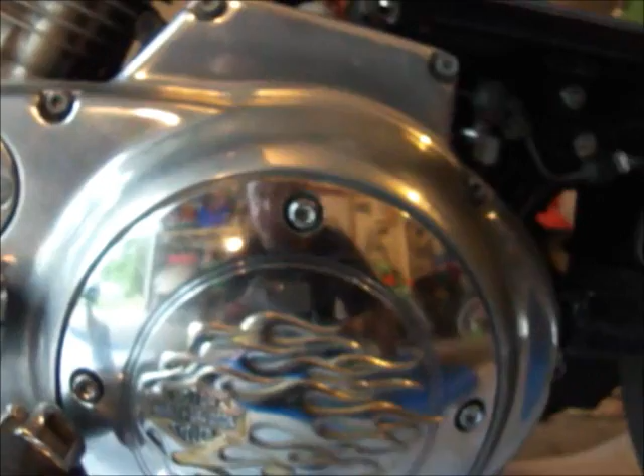I've only started it a couple of times. I'm going to drain it from that plug right there. I've already had that off, I've already had this off. Those are coming back off. I'm thinking it's the throw-out bearing or something like that. Never had one of these apart before.

Yesterday I did the clutch adjustment and also an adjustment in here similar to what Jess Hogan showed in one of his videos, and that was really helpful. I got the clutch play good, but I got this strange squeaking sound in here, so we got to figure it out. Since I've never been into one of these before, it's a good idea to have one of these on hand.

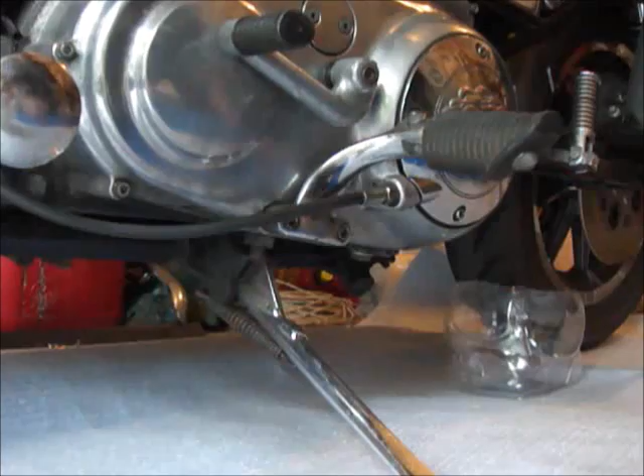Alright, this should come off easy since I just had it off. You don't want to tighten it though.

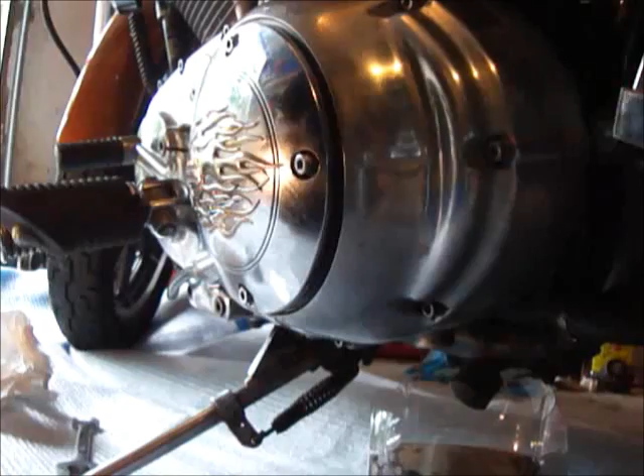Engine's cold, so this is going to take a little longer. We'll just take that out, let it drain in there. Alright, 3/16 Allen.

I was down this road last night, so this is pretty easy. Just take the derby cover off. There's a spring in here holding a retainer nut.

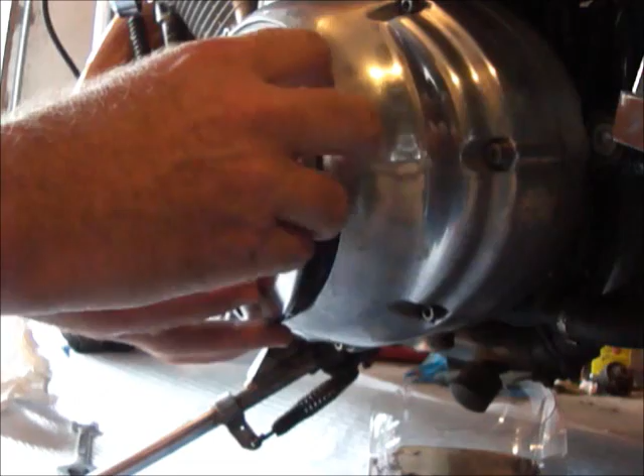This is just held on by pressure. It's just a nut that keeps the adjuster from moving. And this is the action when the clutch gets pulled in. That's as far as I went in.

There's also an O-ring here that was going to fall off, so I'll just put that safely over there. I'm probably going to pull this assembly off, following the manual. I may end up taking this whole section off. We'll see how this goes. Until I find something that looks wrong, I'll just inspect each piece.

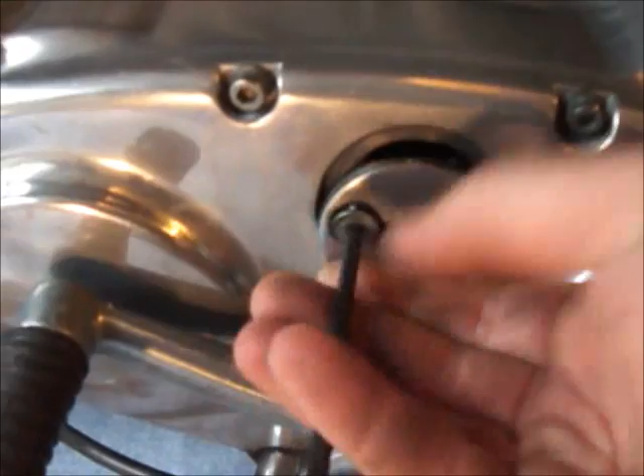Also, another potential source of noise in these is the primary chain, but I checked that last night. It can be up to a half inch of play, and there's not a half inch of play there. I think the issue is going to be in here.

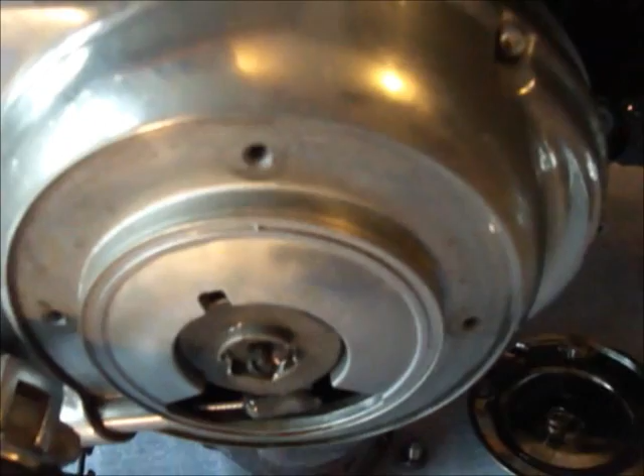Just like Fred showed us in his clutch adjustment video, so loosen this up, that lock nut there, and release all the tension off the clutch.

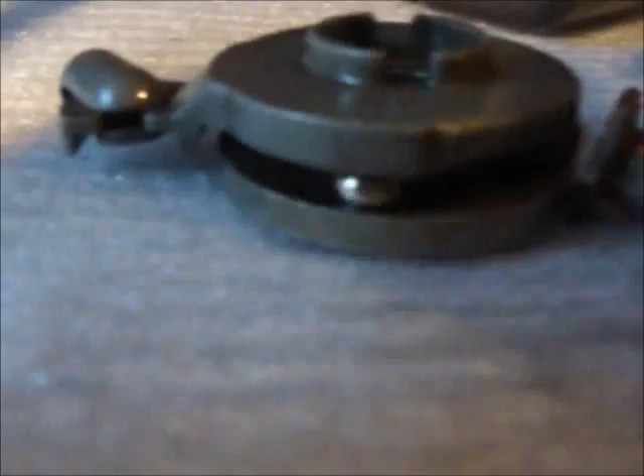So this is the clutch release mechanism, which slides out here, and there's this little nut that goes in and holds it in place. Once you get it in, this is your adjuster, and then this is just the coupling for the cable off the clutch. And that's out of the way.

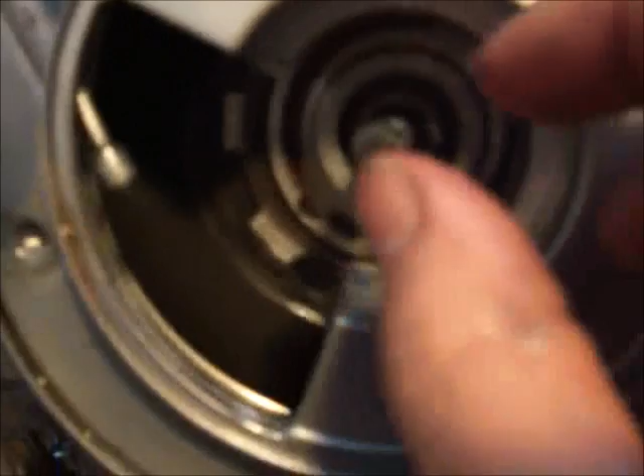But already I've noticed that this just doesn't feel right. That feels real rough, and I believe that's the throw-out bearing right there. Sure don't sound right. That could be the issue right there. That bearing's done. There was some filings off the plug when I cleaned it.

So I think the whole case is coming off next, and that would be that bearing right there, number 24. Just says it's a bearing.

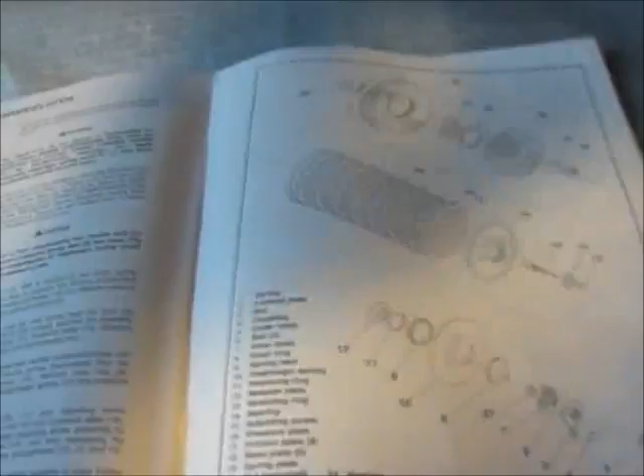I think that's the issue. So to get access in there, I gotta take that off, which means this whole thing comes off, and that'll expose this nut here, which could be loose. We'll make sure that's tight, and definitely gonna have to replace that, because that's an outer bearing.

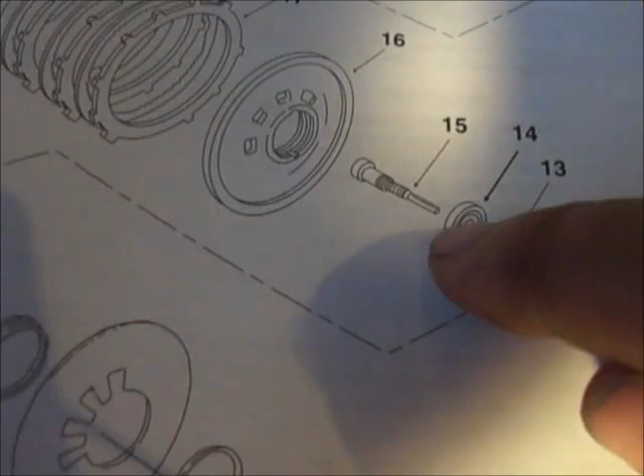I was thinking it was this one, but it's this one right here which is doing that. So we'll give this a go. Alright, start with the easy stuff. Loosen that. This has to come all the way out, all the way out.

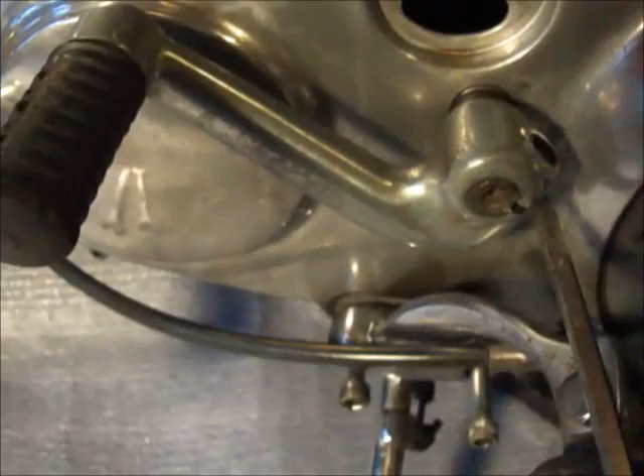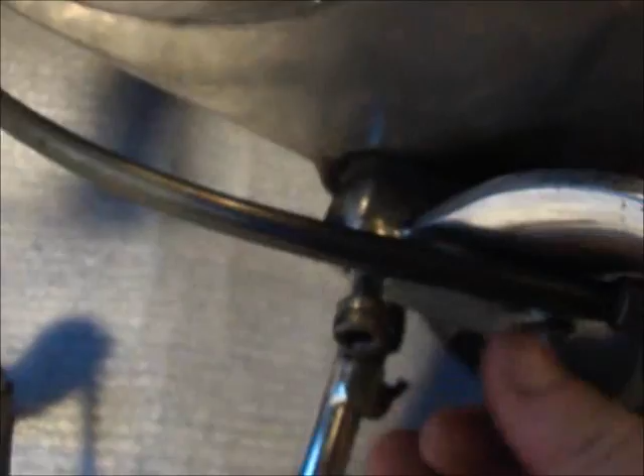Use the screwdriver as a wedge to open that just a touch. The shift lever comes off, and then pop this off. Oh, I can clean that. Might even polish it.

Alright, so I got all these hex bolts out. I noticed they're all different lengths. I was starting to sweat a little bit, but the manual I have shows which lengths go where, which is helpful. There's an adjuster, big adjuster bolt under here for the primary chain.

It said to loosen that. I probably should have taken this cable off, but I don't think I need to at the moment. Let's see what happens. Oh, there's a little rubber here. I'll put that with the shifter.

There's the gasket I'm going to replace. Oh, a little oil spill here. I'll stand this up so I can drain that after.

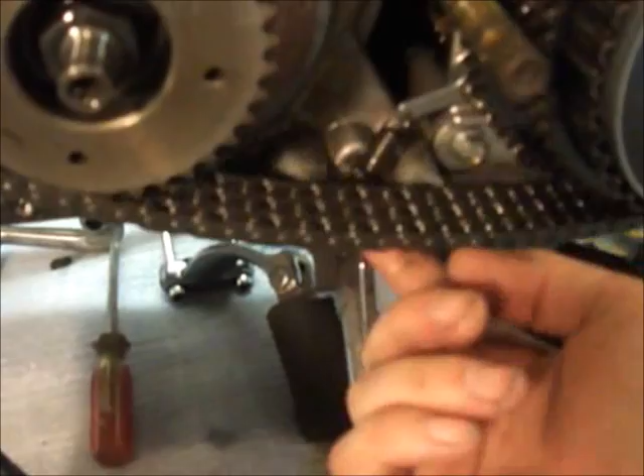Oh, that's more than an inch play. That's loose as anything. I'm thinking that's way too loose. Oh, you know why it's loose? Because the adjuster is not there.

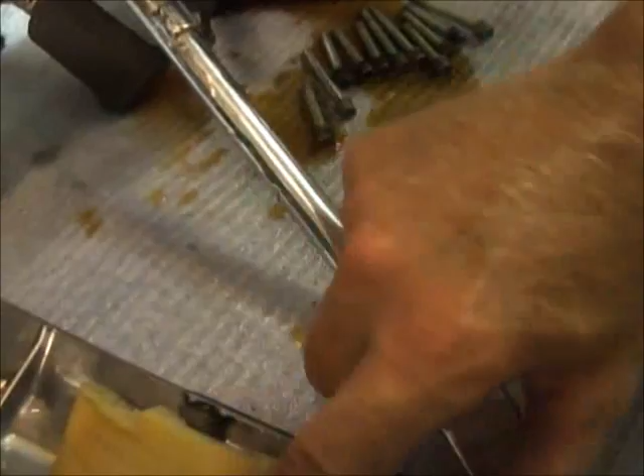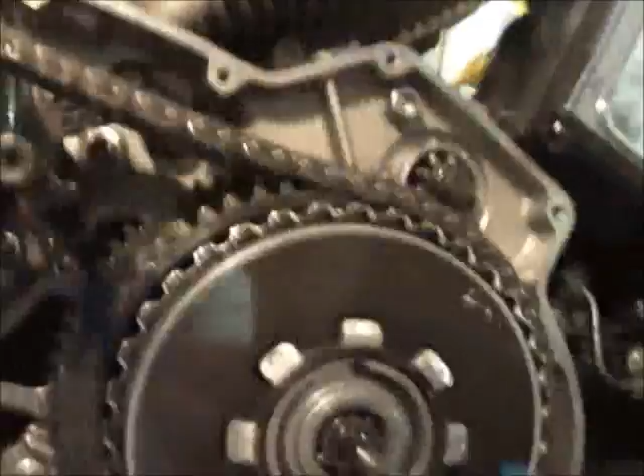This little plate that it rides on actually doesn't look that bad to me. Everything there looks cool. Alright, this is interesting. That's the shift lever.

I don't think the basket's loose. I think the problem is right there, and that's it. Little throwout bearing. And then just gotta figure out how to get that off. Looks like there's a ring, a little clip in there I gotta get off.

Back to the directions. Wanted to make sure that was tight. My biggest socket that I have at the moment is 1 1/8. It's bigger than that, but that all seems tight. I don't think that's loose.

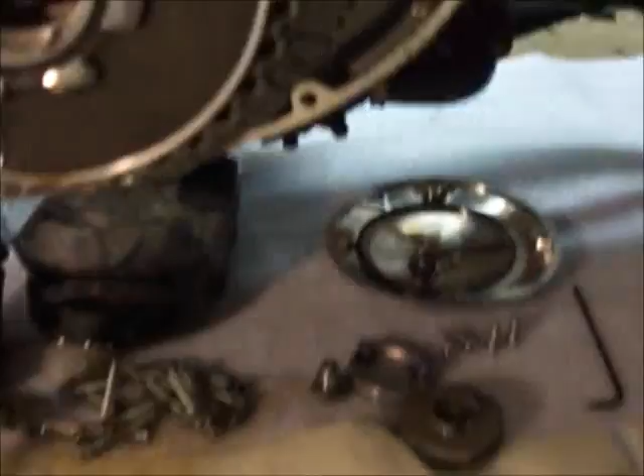The strange thing is, that piece there, I didn't encounter. Maybe a different model, I don't know. And then this setup here is housed in a little part. And that may have to be pressed in, I'm not sure. But this is the issue.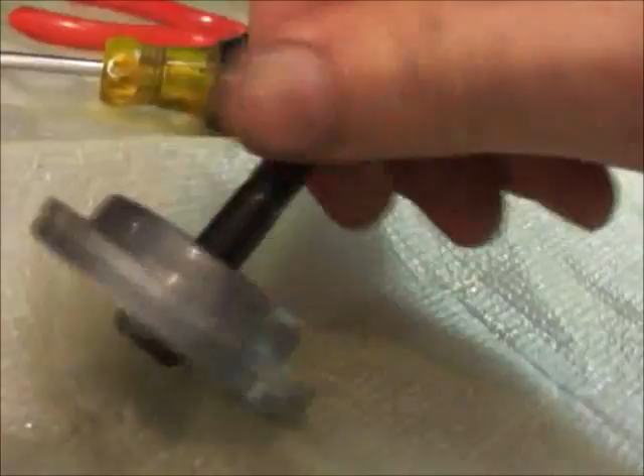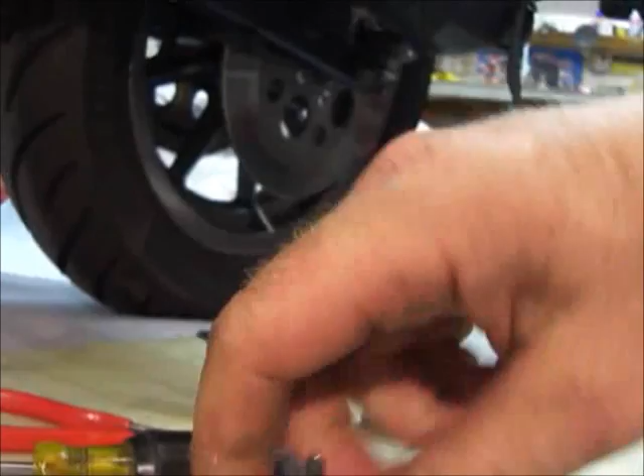Doesn't sound good. And it's pretty loose, so I'll see about getting a bearing for this tomorrow. And a gasket for that.

Okay, so the noise video I put up earlier, it's like 9 o'clock now, and it's hot and it's humid. Let me tell you, I think it's worse in some other areas of the country though.

Harleyman 440 says it could be the automatic primary chain tensioners. Those seem to be okay. Yeah, those noises do seem to travel through the engine. Possibly be an inner cam bearing. I hope not. I don't think it's that. I think it is the throwout bearing now that I have it apart.

Let's see. Double Cab Tom says, ruh-roh. Yup. And let's see, Mr. Adam's Eye. How you doing, buddy? Haven't seen you in a long time. Hope you get it fixed right up. Yep, me too. There's a nice ride this weekend I want to go on.

Okay, we've got Gasser 4x4. Yeah, it doesn't sound too good. No, that's been getting a little worse past couple of days. And Cigar Captain, how you doing, buddy? Not a good sound. Nope, not a good sound. And that was it for comments on that quick little video.